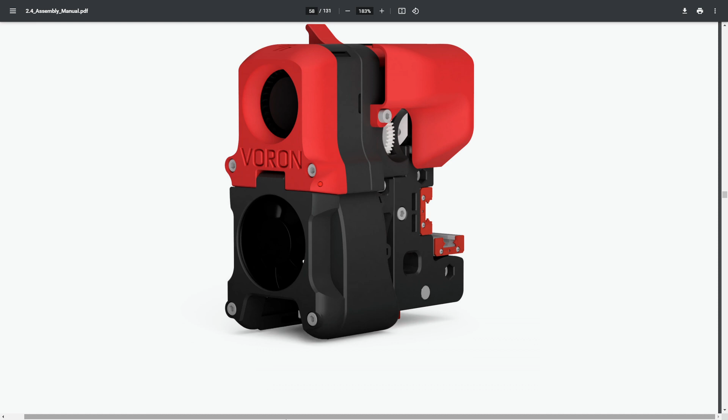If you're at all into 3D printing, it's definitely worth it. So, taking you with me here to do this build, we're moving on to the Afterburner, which is honestly pretty awesome looking. So we left off, we had the gantry all finished off.

We're now at the point where we're starting to build the Afterburner, and the section that we're going to start off with is the rear side of it, the actual side that's going to clamp onto our belts.

I've gone ahead and I've already put the nuts in these, and the heat sets, whatever you want to call them. So those are in there. I do have a video on that, so if you're at all interested, if you have any questions on that, you can look back at my other videos. I do have one on putting those in specifically.

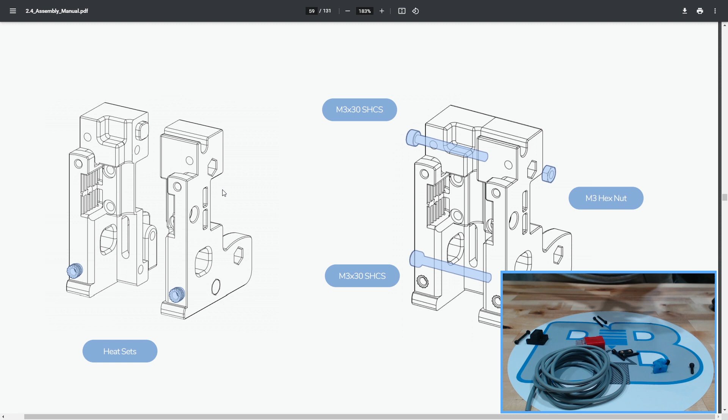Let's see here. So we're going to be using our two rear pieces, heat sets already in them, two M3 by 30s and the two nuts. And basically these two parts are going to meet up like that.

Let's actually bring this in like that. All right. So the holes used on this part are actually like this. And these are keyed, so they do fit together. So you can feel that. You have a nut here and a nut there. So basically you have your end of the bottom, the leg of it all, the foot, if you will, which does not have anything in it. The one next to it does. And then the very top hole next to the groove here as well.

So on the flip side of that, these pieces will be a little slippery for me tonight. We'll go ahead and put that first M3 in there. Let's get that started, and our second one right here, like so.

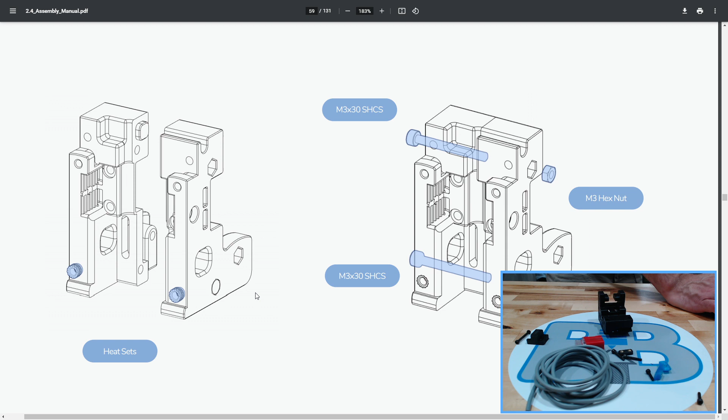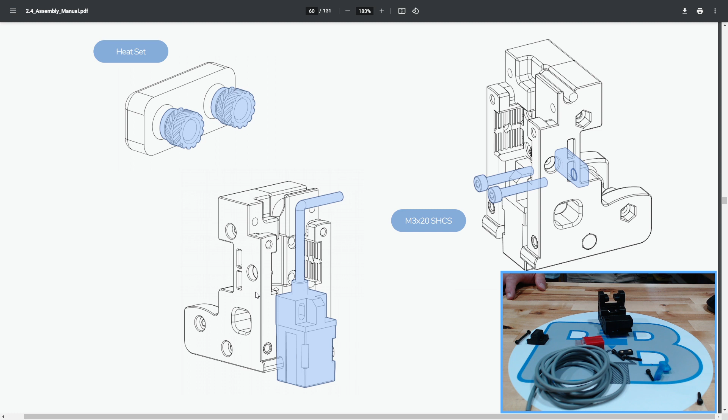From here, we are moving on to our probe and pivot block. So the Voron specifications are for an inductive probe. If you're not sure what an inductive probe is, I will give you a little quick rundown on that. If you're familiar with a BL Touch, which is actually a touch probe, this does the same thing, only it is basically using inductance to be able to tell how far away it is. So think of it kind of like a metal detector.

If you have a glass bed and you didn't have enough metal underneath that glass bed, or if there wasn't enough structure there, an inductive probe would not work very well. So what this does is it basically has a coil inside of it, and when it gets close, basically the resistance will change based on how close it is to that metal. Again, similar to the way that a metal detector would work.

So unlike a BL Touch, it doesn't physically touch anything. It doesn't need to, it is set basically to how far it is away from something. So it's a measurement device that does not need to touch something, which has its positives in the sense that there's no wear parts, there's no moving parts in here whatsoever. So this should last nearly forever as long as we don't burn it out electronically.

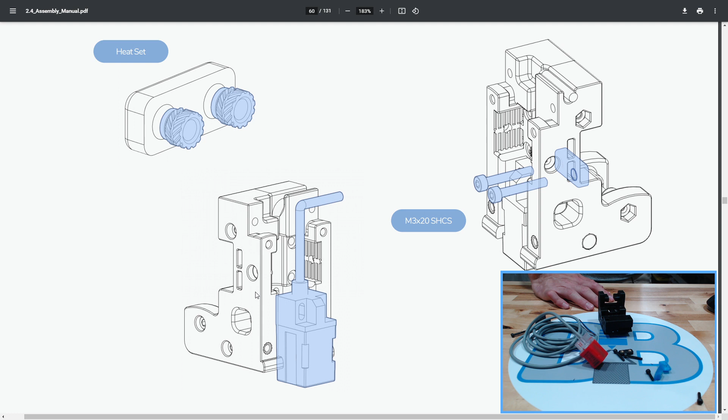All right, so according to, let's see here, we have our piece facing forward, gonna go to the rear side of it. That's where our heat sets are. And this, kind of hard to tell, but basically it does have a rib right here that sticks up and it's flat on the back. The flat surface is facing towards the back, the rib part facing upwards in this set, and then basically your cord, your wire, is going to wind up going through like this, and that's what that groove is for at the top.

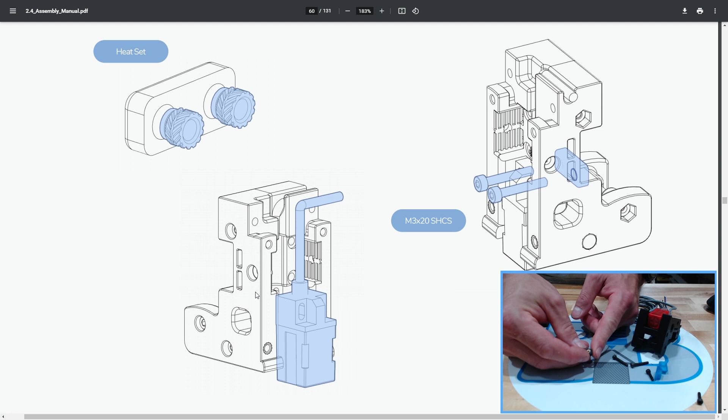This is going to be attached utilizing, let's see here, the small flat portion, also with sets in that, and that's attached using two M3x20s, which I have right here. So this is going to allow for you to mechanically adjust how far down this unit is.

If I can get my fat fingers around it, we can get that done. Okay.

For right now, you really don't need to tighten this up very much. I'm actually going to take mine and place it as low as it will go, hopefully stopping me from forgetting it. So that's set like that. This wire is going to go through like this, and that's what that is.

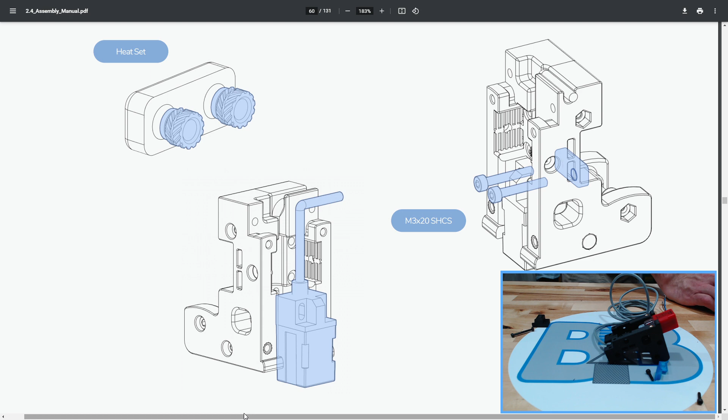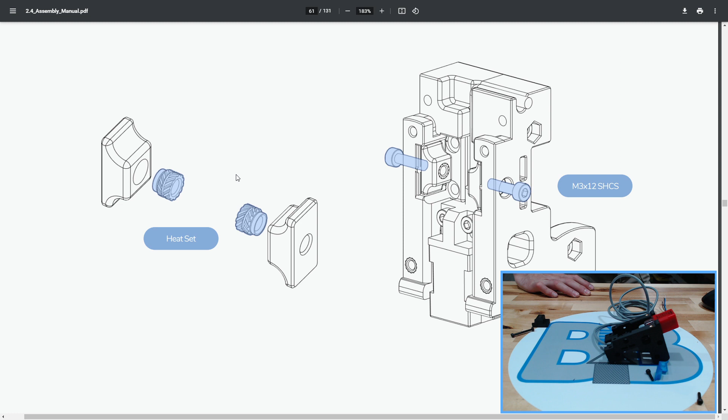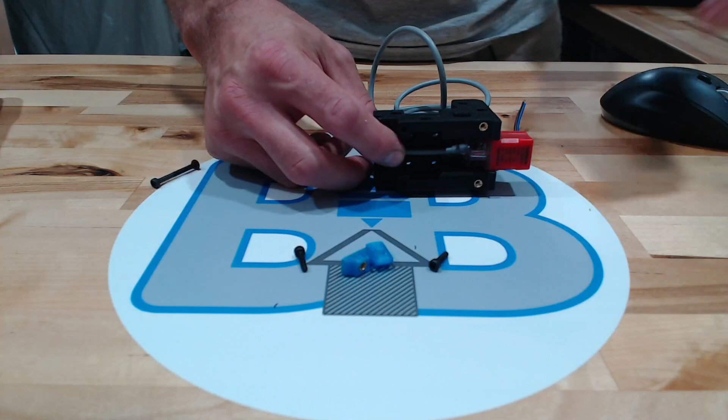All right, back to the screen, back to the assembly manual. So here the next portion we have are the two clamps for the actual belts that are going to come through on this piece. On the inside here, we have a groove portion right here and right here, and that's to hold the belt. These pieces are going to basically be pushing against that with the belt to hold them in place. These are going to be held in with these M3x12s. So get that on there.

Again, you definitely don't need these tight right now. We don't have the belts on here yet, so it's not going to help us at all to have them too tight. So like that, they're in place.

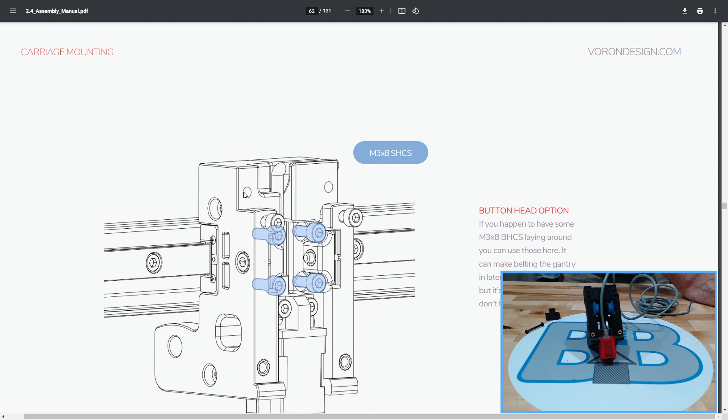All right, now the fun stuff. So they want us to mount the carriage to the actual gantry. It says here, button head option: if you have some M3x8 button head lying around, you can use those here. It can make belting the gantry in later steps a little easier, but it's not a big deal if you don't have them. Okay, good tip, I guess.

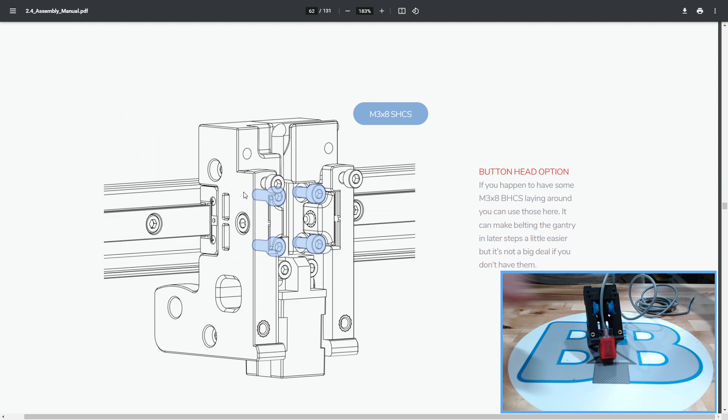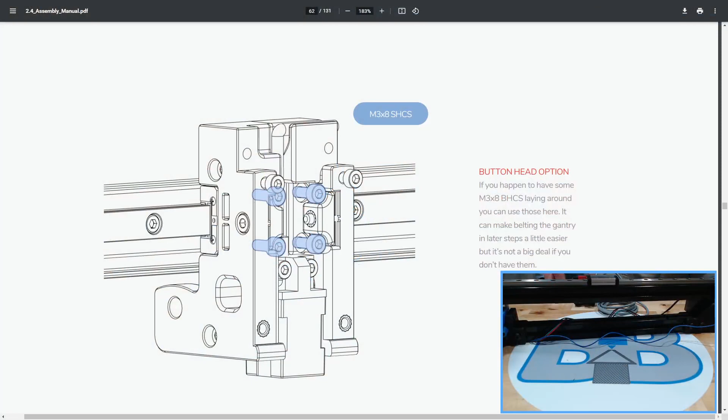So we'll go ahead and get our gantry back. Place that like that. It's kind of neat. And let's see if we can get that to a place where you can kind of see what we're doing.

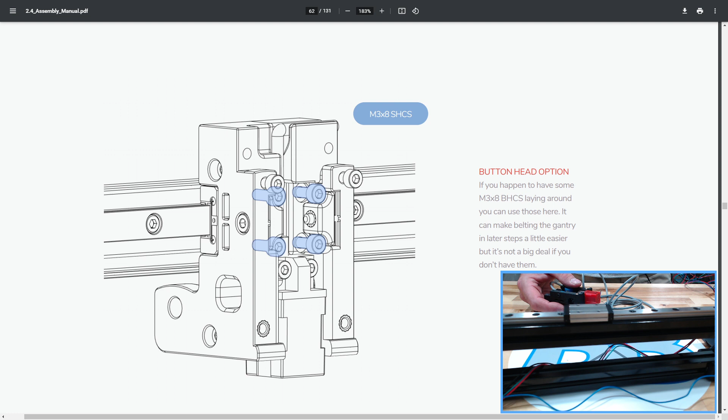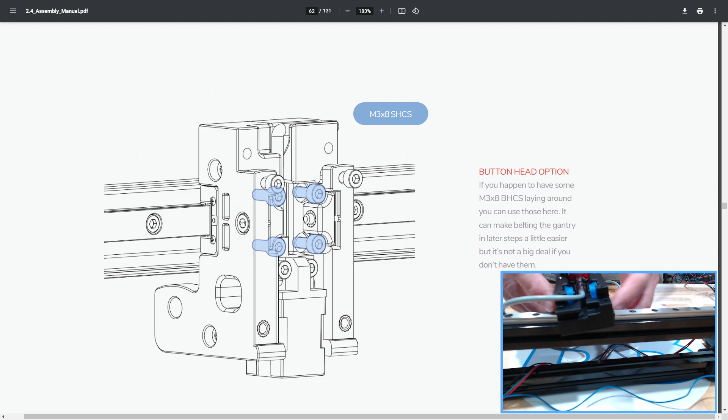So this is going to get mounted with the inductive probe facing downwards. You're looking at the top, I'm looking at the bottom. So that should be something like this. Actually, go back to that view right there, that might be a little bit better. A little closer there. So basically, I got my two rails right here.

This actually sits right on top. It fits like a glove, to be honest. Maybe it's beginner's luck, or maybe I don't know what I'm getting into.

We'll see. So we're going to need some M3x8s for that, which I thought I had already pulled, and I do. So let's see here, we're going to need 4 of those. 1, 2, 3, 4. I'm actually going to pull my wire back a little bit here and see if I can line these up. It's actually starting to turn into something at this point, right?

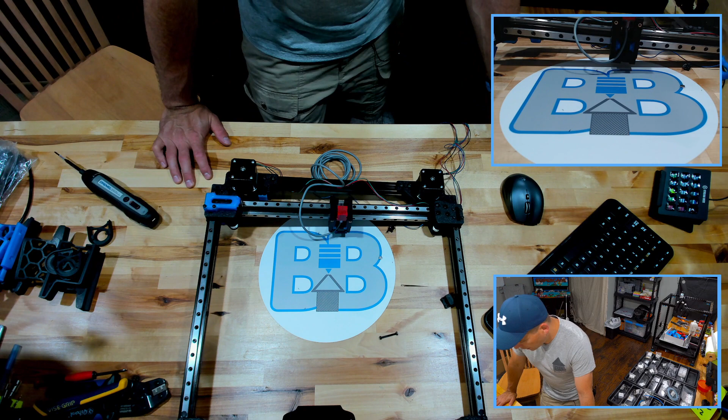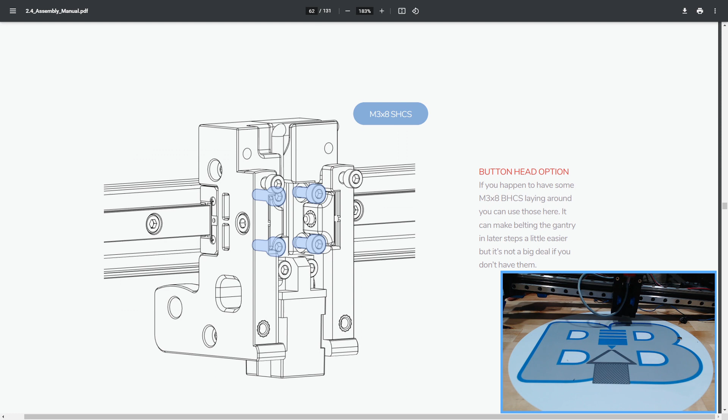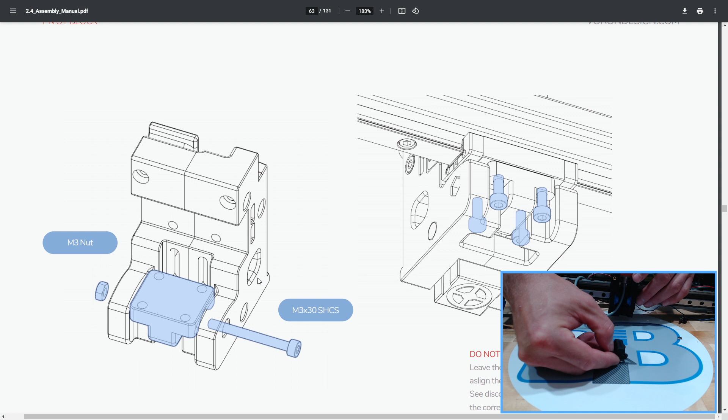And let's see here, now that we have that attached there. All right, now we have a little pivot point. And what this guy allows to happen is basically it's going to be sitting, which is kind of odd that they had me do that first. Oh, I guess we got to detach that. So that's actually going to sit on the other rail, and it allows for some very slight movement.

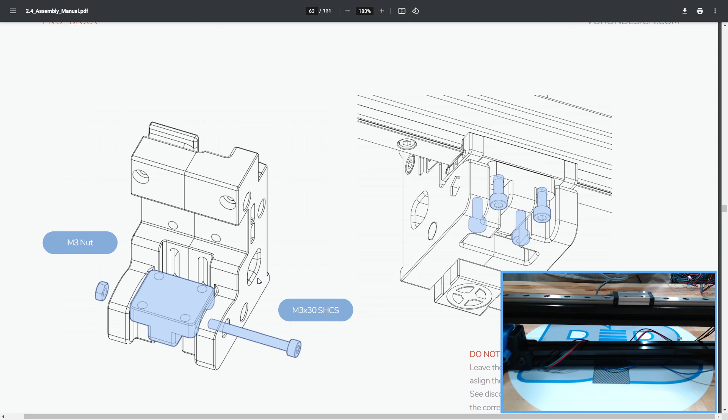I don't know if it's just because the expectation is that the rails aren't 100% aligned, but basically this goes in like so. It has a hole in the middle, a key. These are beveled on the top end, so that fits in like that. And that's going to be held in place with an M3x30.

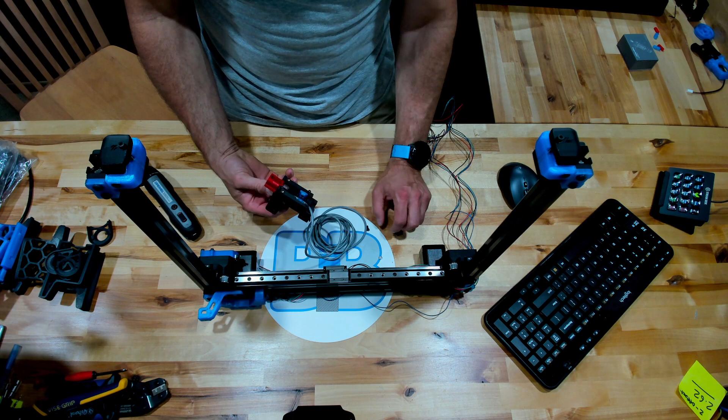Okay, M3x30. I'm looking at it from that direction, so it's going to be like this with the screw facing this way. I have not put that nut in yet.

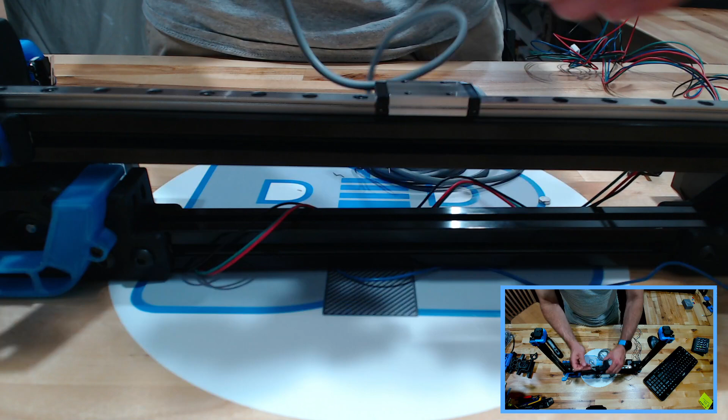Another quick tip, if you like quick tips. One of the best ways to get nuts in, since most of these things are pretty tight, is to thread that nut onto the screw you're going to use. Just a couple turns, 1 or 2, that's all you need. Get it on there, then get your piece, and you have a method to insert that nut straight. Unscrew, and you should be good to go. That will help ensure that when you screw into that nut, it's not all wonky. It's a great word.

I guess it would help if it was just slightly deeper. Or maybe it's just going to fight with me. There we go. All right, so that's just tight enough to put it where it needs to be. I don't know how much movement that's really going to get in the scheme of things, but that's the way they want it. So put this back the way it was, and put my screws in here again.

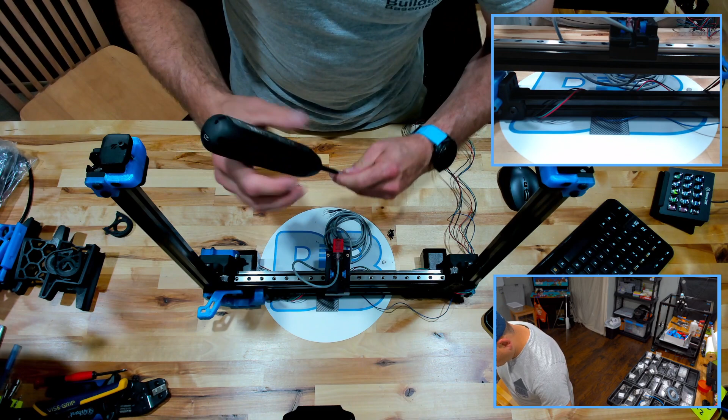And then put that back. And put our 4 — again, we have 4 M3x8s going in the back side of this for the double rail. I mentioned when I was putting this together that there are some notes to only use a single rail. There's some logic behind that in terms of stress and the fact that aligning two things perfectly straight is near impossible. On the opposite end of that spectrum, you have the argument that it's going to be a lot more stable if you have 2 of them on there.

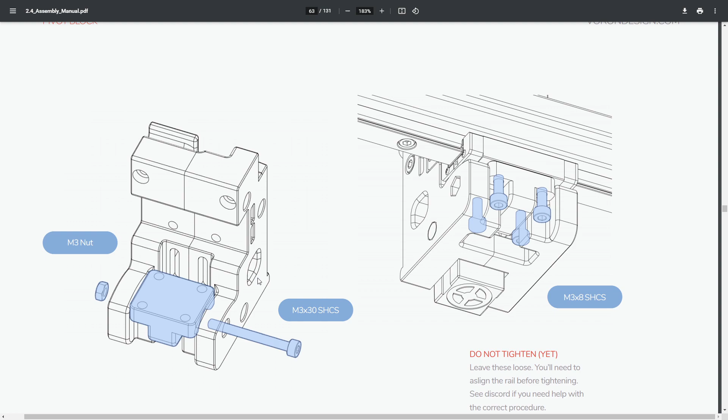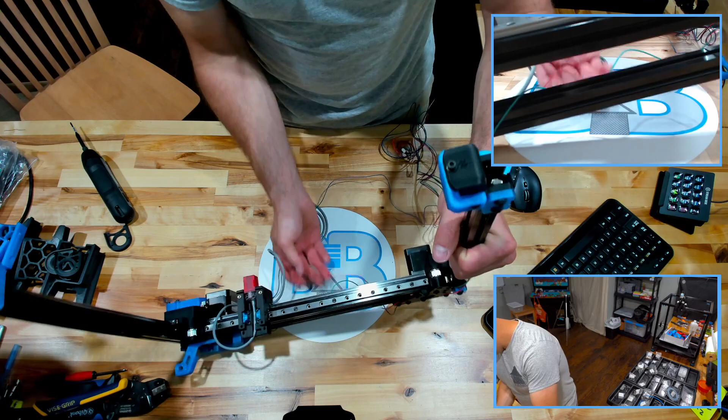I will say, as of right now, there is some considerable drag on there. It's not terrible, but there is some drag. So that might be something we can adjust a little bit by loosening up our rails ever so slightly. You know what? Why don't we try that right now? Why not, right?

If it doesn't help, we can always put them right back to where they were. So the thought is, if these are — oh, there we go. Oh yeah, that is a ton better. So what I'm going to do, and this is nowhere in the manual, just testing this out for myself — don't know if it's going to work or not, but I'm actually going to use the base of our afterburner as a guide for where the rails should be.

I'm leaving one permanently affixed tight where it was. The other one is just ever so slightly loose, and I'm going to run that down as I go. I can see right now, as soon as I tighten that down, it actually gave me some difficulty there. So let me see.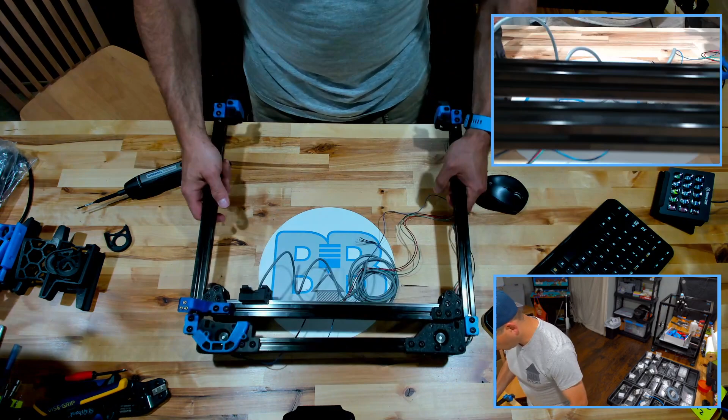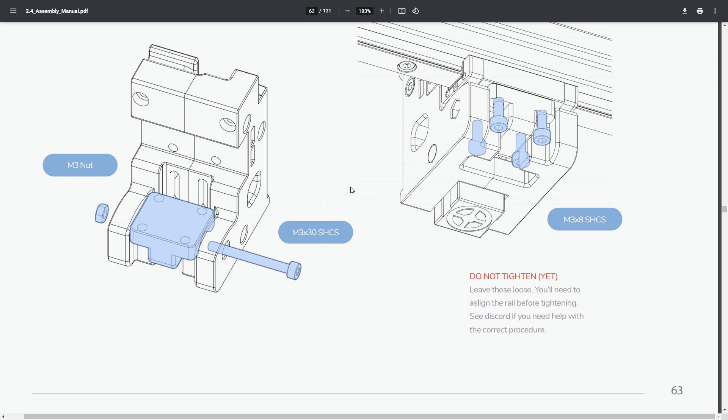All right, back to the screen. Do not tighten yet — leave these loose, you'll need to align the rail before tightening. See Discord if you need help with the correct procedure. Oh, interesting, okay. So they didn't want me to tighten those very much. Let me see if...

I can tell you it makes absolutely no difference to my eye, to my ear, and to my hand.

So we're going to go ahead and tighten that back up. Yeah, it's not that bad. All right.

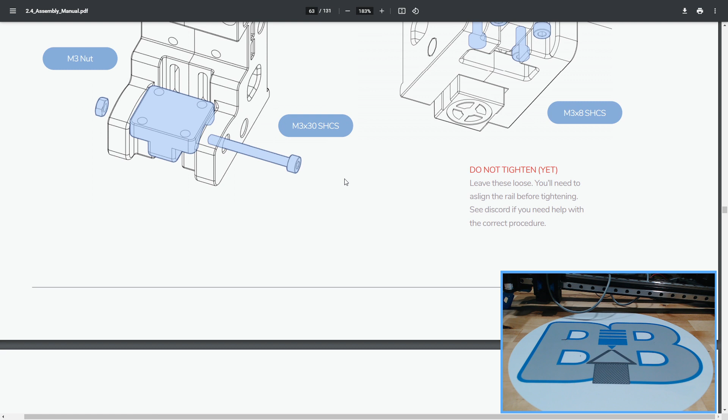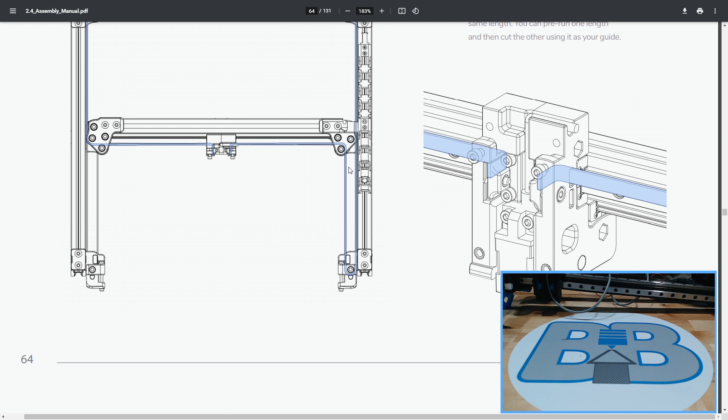Let's see now. Okay, so we're at the belt portion of the build here. My plan is to skip over this for now and continue with the actual afterburner as opposed to doing the belt.

Hey, Keeg. Hey. What are you doing? Oh, I just came down to say hi, pretty much. Time for bed? Pretty much. Want a hug? Sure. All right. Have a good night. Yeah, I'll be up in a little bit. Okay, all right. Love you. Love you. Bye. Bye.

So we get that, let's get back to this. Sorry about that.

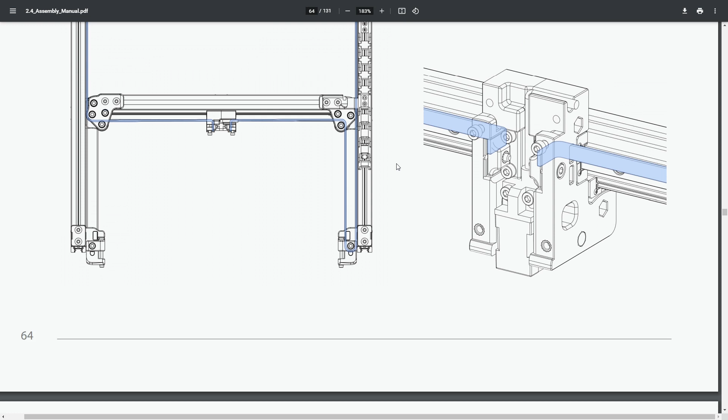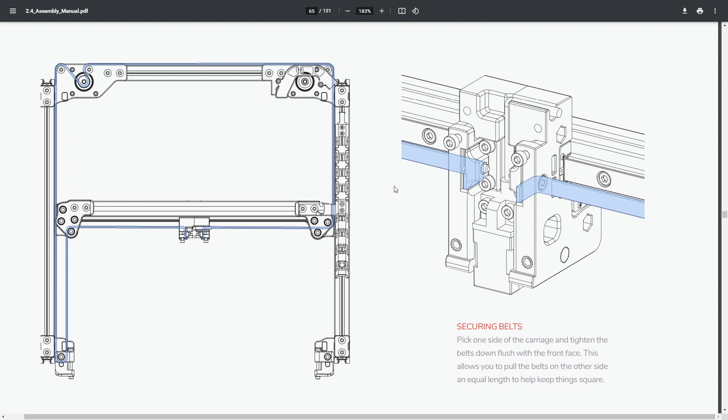So I am going to do a video on the belts, but I'm going to do that all in one shot, and that's going to take some routing that I don't want to get into right now. So we're going to continue on, like I said, with the hot end and with the afterburner. It doesn't look like it's going to change our course very much to not do the belts quite yet, so that's my plan. Hopefully everybody's good with it.

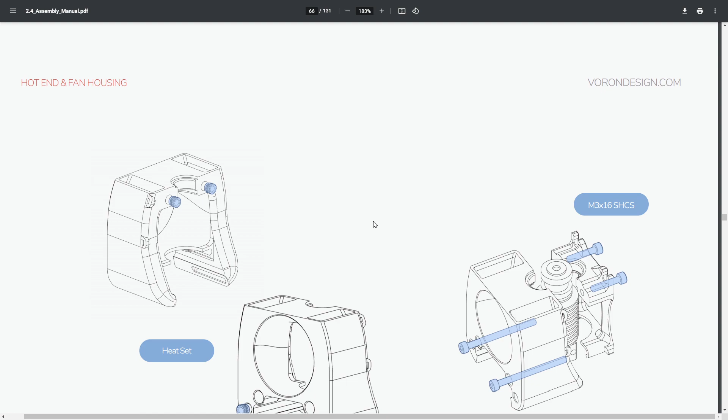So we get down to the shroud parts and the hot end and the back, and in a previous video I had talked about the dragon hot end. So let's go a little bit further into that here for a moment.

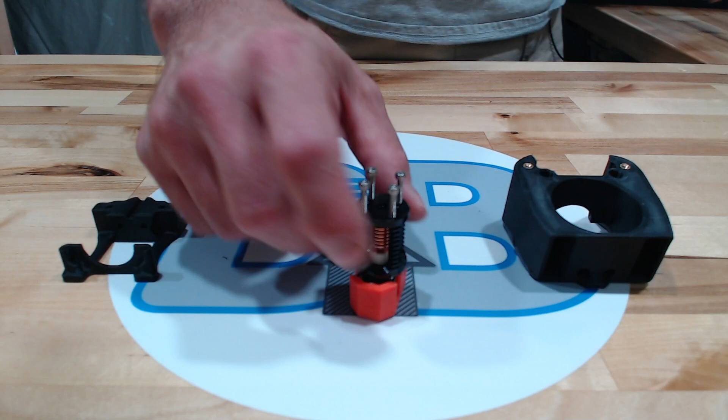So the dragon hot end is a lot like the Mosquito. It's not exactly the same, but it's enough that someone got upset and sued somebody else.

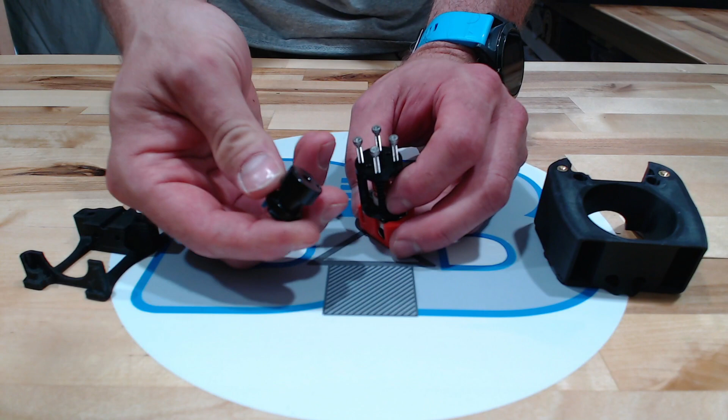So these may be hard to come by at this point, but it should be the same as the Mosquito version of this. So this comes with a slot mounted system. So basically this comes with this portion mounted to the top of it. This comes off, it's held on by 2 screws, and basically you wind up with 4 screw holes here at the top of this.

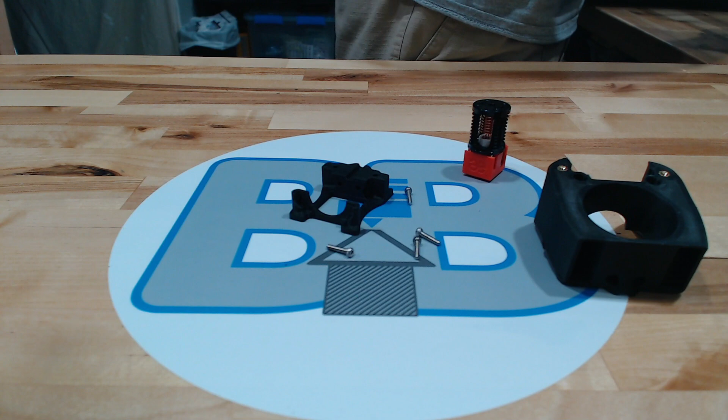Get rid of that. So...

The actual instructions show an E3D hot end, and we're veering slightly off of that. One did come with the kit. So if you are going straight up with what the kit came with, you're going to wind up with a clone of the E3D. There's nothing wrong with it, but I thought this was a good opportunity to spend a tiny bit of money and get a good upgrade.

Again, nothing wrong with that, go ahead and use that if that's what you're using. That's what the instructions show, that's part of the spec. But this is one of those little specs that are part of this build that aren't concrete, they're not set in stone. A lot of different people have different reasons for using different hot ends. I plan to play with some materials that I think this will help me with, so that's why I'm going with that hot end.

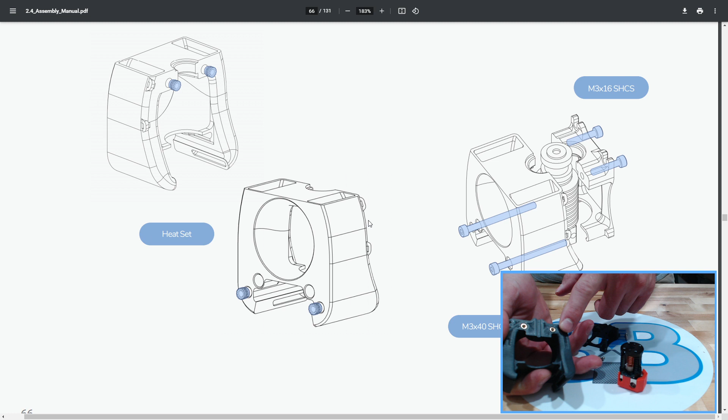All right, so I already got my heat sets in there on that side as well as that side. So that top picture that you're seeing is showing these, the middle bottom picture is showing these, and then basically our assembly...

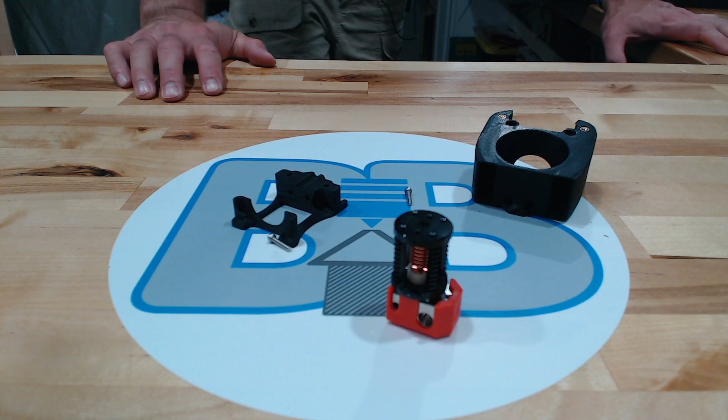I just dropped a screw. Alright, well, our assembly on this looks something like this.

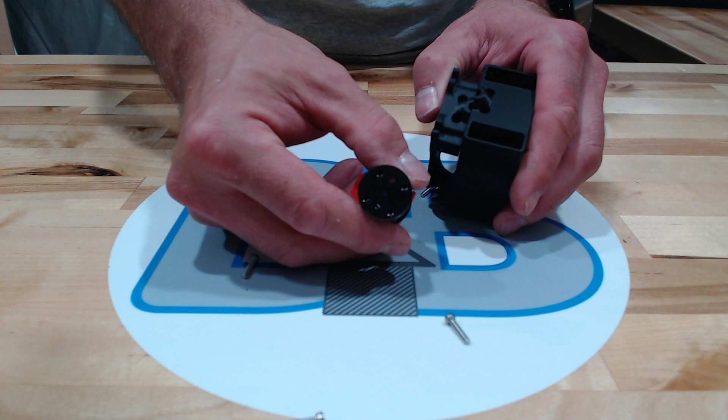So this is going to mount using the screw holes, and this again is a different part. This is available, it's in the STLs. You print basically based on the hot end you're going to use. This one has the screw holes at the top to use for the mounting of this on top, as opposed to just clamping shut on it. Which is another reason to go with a hot end like this - it's more of a mechanical fit as opposed to just a friction fit. Not that there's anything wrong with the other one, but just one of those things.

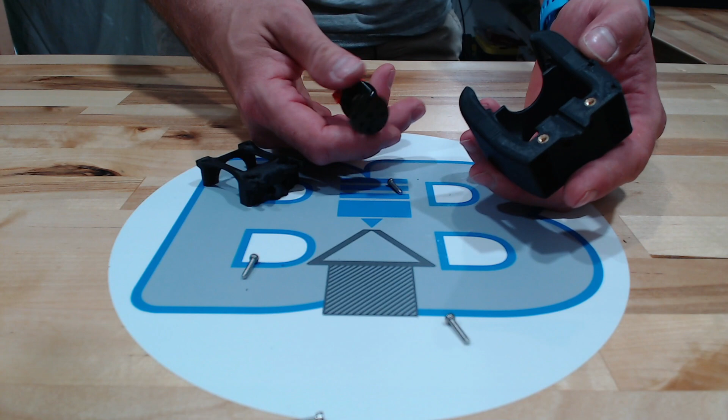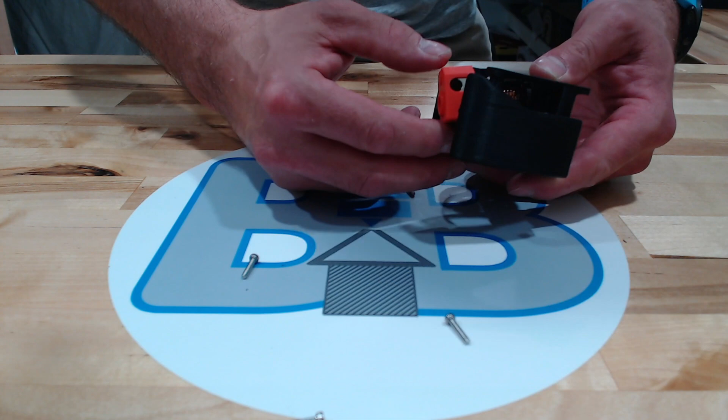So the way this is going to go is we're going to be putting this in like this, and like that. One thing I'm not 100% on is the direction. I feel like it's notched out to go in like this, so that's the way I'm going to go with it.

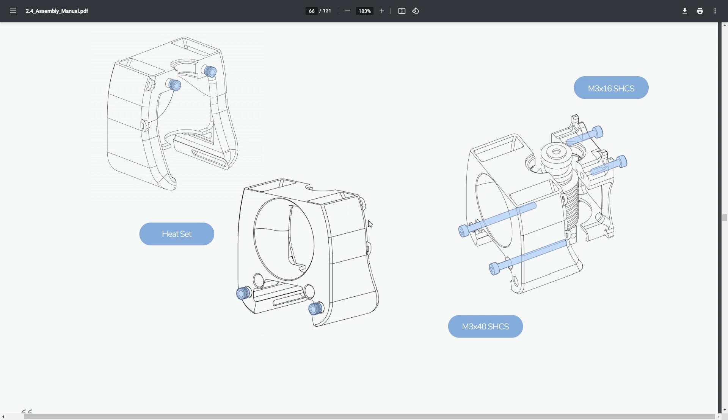And basically the longer 40 screws are going to the bottom, the shorter screws at the top. So something like that. Start those. These are going to go through there. Long on the bottom, shorts on the top. Tighten these up.

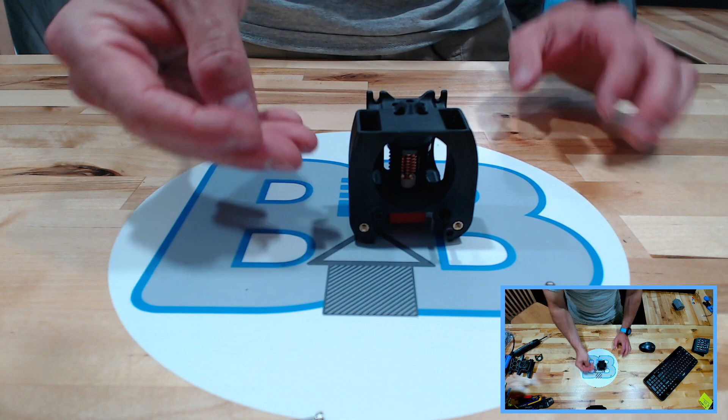And that leaves us with the screws. These actually come with the hot end, so I know they will be the right ones. What I don't know for sure is what size that is.

Let's take those up for a second. Lining these up could be a little fun. That's right, Allen key for that. Let's see, where are we at? There we go, alright, see if we can get the first one started. Second one started. And 3 and 4 should slide right in.

Alright, kind of odd, I got a little bit of a jiggle there. I may have used screws that were too long.

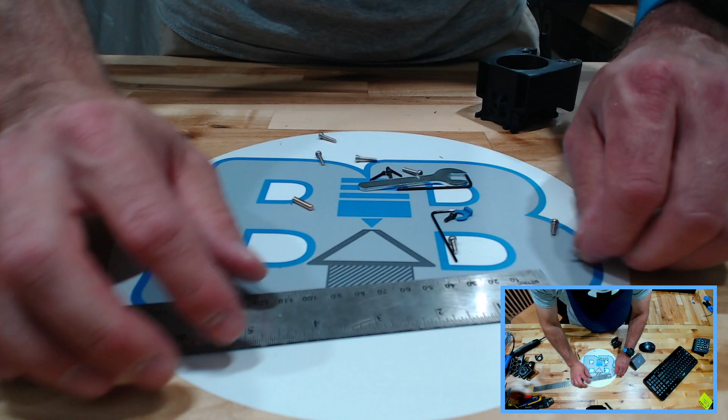So with the additional screws that came with this hot end, the Dragon hot end, there are some longer screws and some shorter screws. You're going to want to make sure you use the slightly shorter screws, and I'll give you a measurement on those. Screws you want to use are about 10 millimeters. I'm sure there's probably a document someplace that says that, but you could spend a lot of time looking through documents trying to find random little bits of information.

And then number 4. What I don't see, and I'll have to look into, but I am curious of, and it probably has to do when we start working on the extruder, is I'm assuming there'll be a section of Capricorn or something going in the top here for our filament feed from our extruder.

It's pretty, ain't it? Alright, so we still need that. I can get these things put away, these parts that we do not need. And just for reference, these are the little guys that are in the hot end holding things together. It's kind of hard to see against the black, very small.

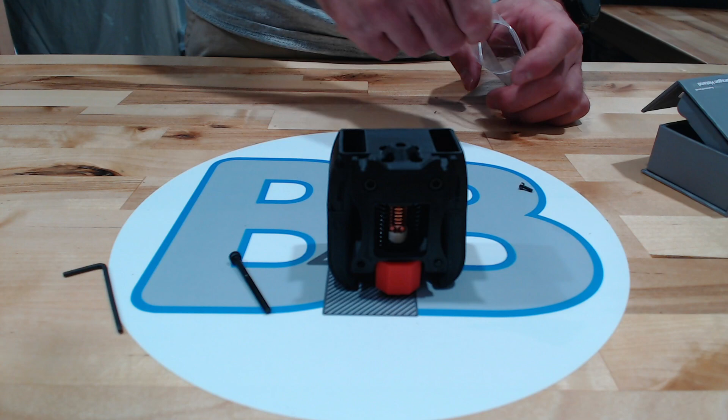Alright, and shove that away. Oop, one last piece.

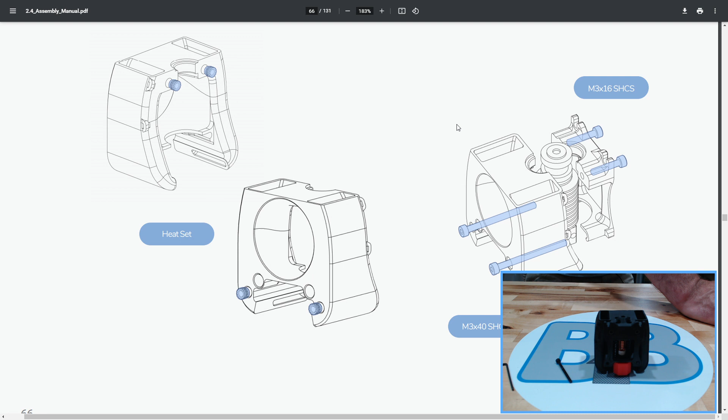So with a slight modification to that, we're moving on from there to getting back to our carriage. So test fit housing, make sure to test fit the hot end housing. It should be able to slide in with firm pressure, but not be loose enough that it can wobble.

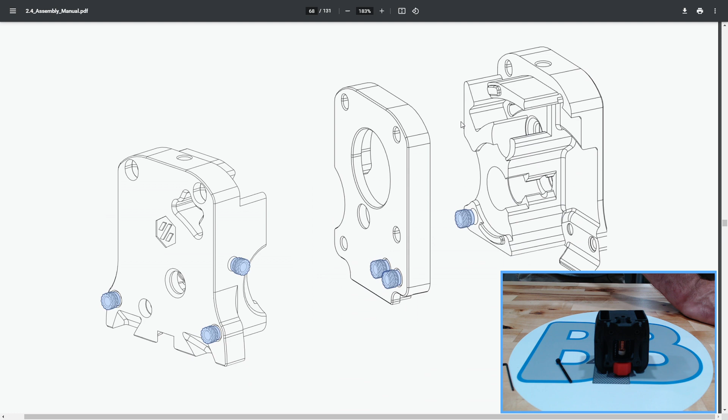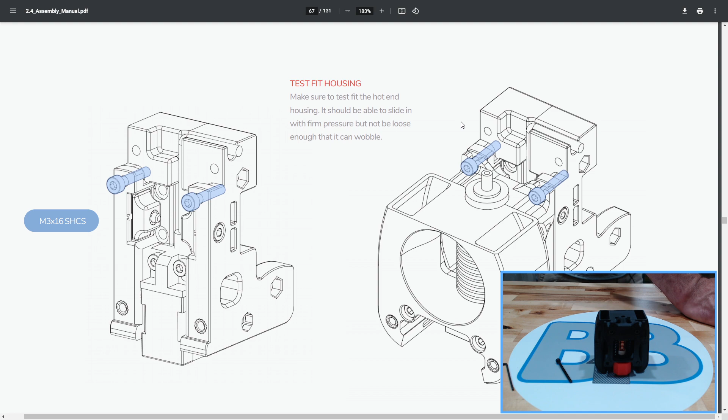Okay, I'm not sure if it actually wants to attach this or not, but I'm going to assume they do. So it looks like we're using some M3x16s on that, 2 of those. And we are getting down low on those.

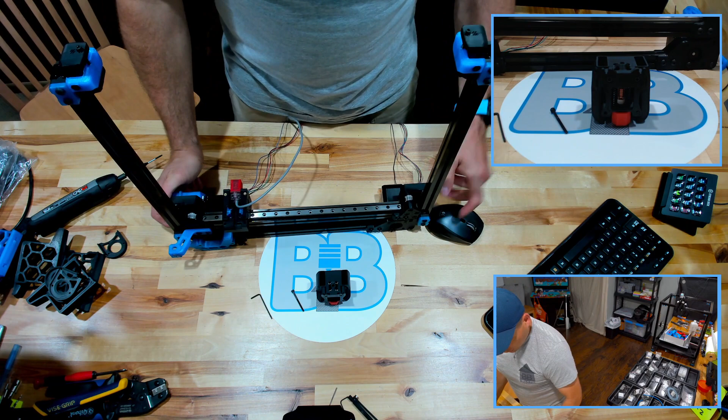It's kind of fun when you get into a project with a lot of pieces and parts, and it's a little scary when you get low on certain pieces and parts. It makes you wonder if you have enough, but at the same time you're like, gee, you know, there's an end to this. You actually get something out of it.

So they are showing, actually they're showing 2 things in that picture that I find interesting. One is they're showing some tube coming out of that hot end, which I don't currently have, but we'll see where that lands us. And they're showing the part going on there. So let's see here. Oh yeah, there was that too, that was interesting to me.

So this is sitting on there like this. Which makes me think that we should have flipped that around. So feel free to fast forward about 1.5 minutes while I flip this around.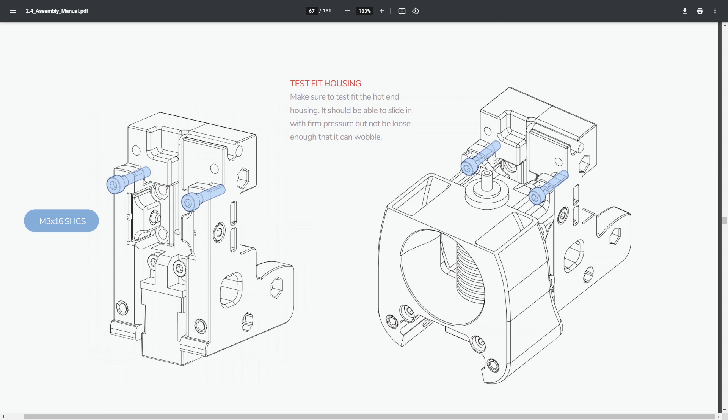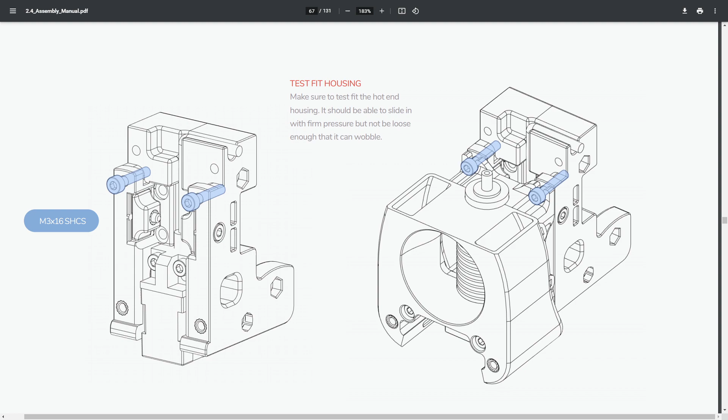The longer M3x40s that we first put in a few moments ago that were falling out for me, actually are what holds the bottom section of this to the carriage section. So that top section is being held in by the M3x16s, but the bottom section is being held in by the screws that we already kind of put into place.

It's going to be kind of hard to show this, but I will attempt. This portion of the carriage actually touches on these little nubs sticking out, and it actually holds it in place. And actually, without even any screws in there, it's pretty positively locked in. So go ahead and tighten these up real quick. And then again on these. These are a little difficult. Let's bring this back around again. Just get a better view.

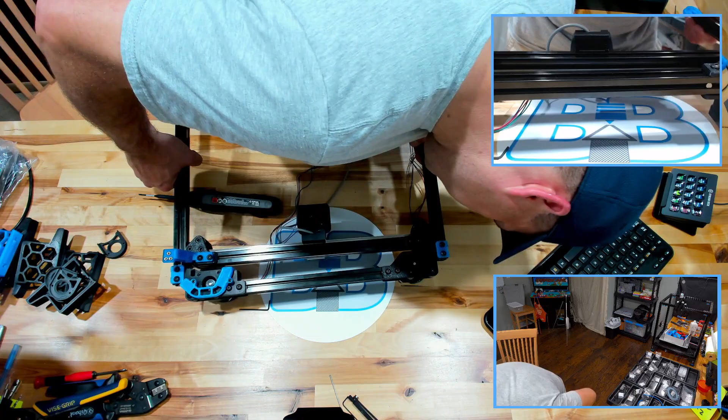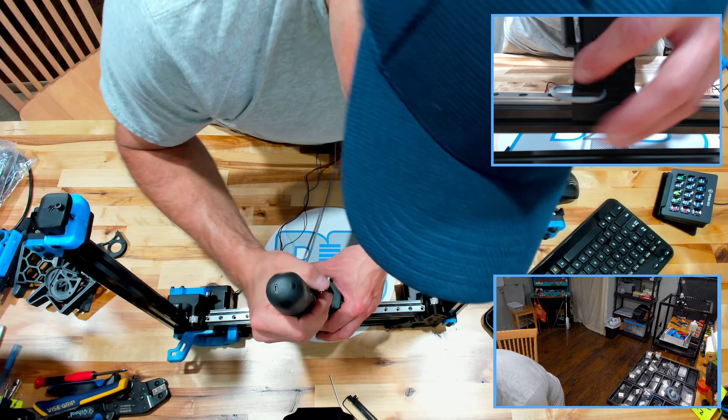I'm wondering what those are actually screwing into, because I think those are just screwing into plastic. There's nothing in there, and there's nothing on the back side, so I don't believe those are actually screwing into anything. So the majority of your mounting is actually happening here as opposed to back here. But there's additional mount points up here that you're probably going to wind up using here at some point.

Man, that's cool, right? Actually, something coming together. So this design too, I'll point out while we're here. Let me get that zoom in to focus. This is 100% open on the inside. It's pretty thin. So it's doing two things.

One is it's moving cold air from this top section through this complete area so that your hot end actually doesn't heat up the plastic too much. So that's a plus. That's on top of the fact that you're going to have a fan blowing through the front here. So you get that cooling effect from there because this is ABS, it's not metal, plastic there. And then secondly, you have a nice wide and direct flow right where you're extruding from. So if you're using material that needs a good amount of airflow around it, that should facilitate it. Very nice design. So kudos to the dev team on that one.

So, clockwork heat sets. So we're getting into the extruder at this point, and that's where I'm going to call this.